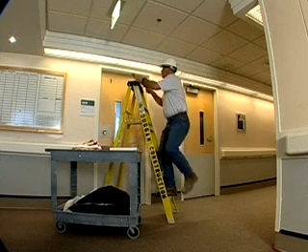Because the performance of a Firestop system in an actual fire is largely dependent upon how it's installed, inspections of completed work have become an effective tool in ensuring life safety compliance. Proper inspection, however, requires more than simply ensuring that the Firestop is present.

Authorities having jurisdiction have been performing thorough inspections on Firestop in new construction for more than a decade. But because this level of scrutiny is rare on work performed in existing facilities, a chronic problem of missing or improperly installed Firestop has become widespread.

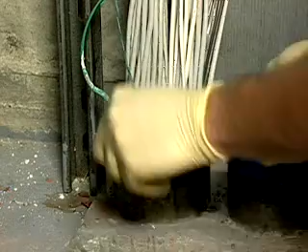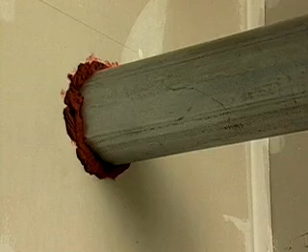It seems unfortunate that inspections are even needed, but the reality is that too many untrained people are expected to do fire stopping. When inspections reveal deficiencies, however, and you hold up your payment to vendors and contractors, the message quickly becomes clear and standards begin to rise. The purpose of this tape is to help provide proper inspection practices as a tool to raise the performance standards of installed Firestop systems.

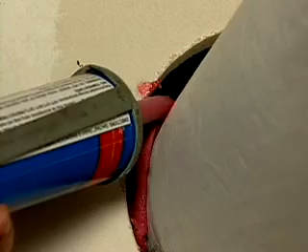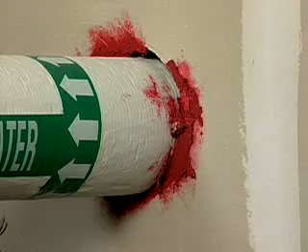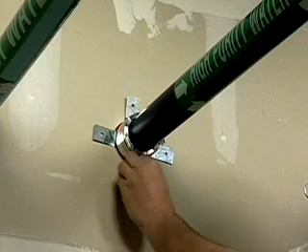If you ask the average trade person how to inspect Firestop, you will likely be told simply make sure that the penetrations are sealed with red caulk and that there is a UL logo on the tube. Unfortunately, this would confirm little more than red caulk is present, which really tells you nothing for several reasons. First, caulk alone is often not enough. Other accessories are sometimes needed, such as collars, wrap strip, mineral wool, or aluminum foil tape. If all you were looking for was red caulk, and these items were required, an improper installation might inadvertently pass inspection.

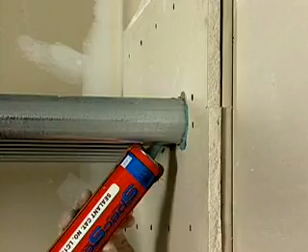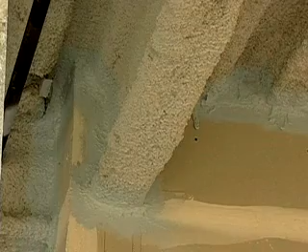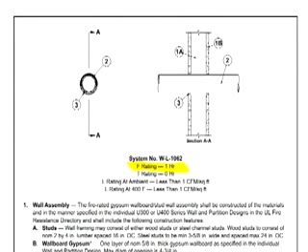Likewise, there are many legitimate Firestop sealants that are not red. So rejecting an installation on the basis of color is simply inappropriate. Finally, there are a host of other parameters to consider that are overlooked by simply inspecting color. These factors are all detailed in the UL system information and include such things as making sure the sealant is installed to the proper depth, the hourly rating of the UL system matches the rating of the barrier, and making sure that the product is tested for the type of penetration in the barrier.

So how do you know if a given installation is properly installed? In fact, the only way to be absolutely sure is to perform a destructive inspection. But since cutting out every installation is impractical, let's review how this can be better accomplished. The first step is to ask the installer for a copy of the UL system that was or should have been followed during the installation.

Now, the UL system clearly spells out how to install the product, what can be done and what can't be done. It's a roadmap. And if he or she can't produce it or doesn't understand what you're asking for, well, it's best to simply reject their work without going any further. This is done for two reasons. First, if they installed the product without a roadmap, chances of a compliant installation are rare, and there's no point in wasting any more of your time.

Secondly, this sends a very clear message about what's expected. People are smart and learn quickly, and when the time comes to reinspect later, chances are they'll be better prepared. If they can produce a UL system for each installation that you choose to inspect, then these are the steps that should be followed.

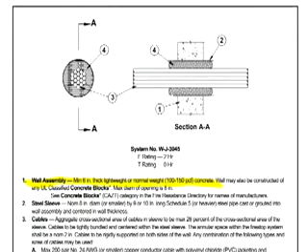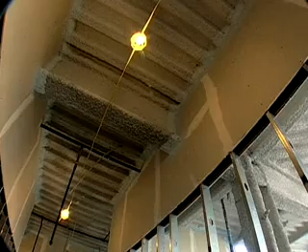First, confirm that the barrier type matches the system. If the drawing you were given is for a concrete block wall, but you are looking at a gypsum wall, there's a problem, and the installation should be rejected. If the opening in the barrier is a construction joint, the additional step of confirming whether or not the joint is static or dynamic is necessary.

If you're unsure whether or not the joint moves, either check with a professional engineer or err on the more conservative side and assume that it's dynamic. A UL system that's tested in a dynamic condition may be used in either joint condition, but a static tested UL system may only be used in joints that don't move. Likewise, if you have a 3-hour barrier but are handed a 2-hour UL system, there's also a problem. Whenever examining wall penetrations, be very careful of the hourly ratings.

In concrete walls, a system with a 2-hour rating includes coverage for 1-hour walls as well. But in gypsum wallboard walls, a system that only says 2 hours doesn't include coverage for 1-hour walls. Now, if it says 1 and 2 hours, then of course it can be used in either. Now, while these seem like nitpicking details, they're published this way for a reason.

A system that may work in a 2-hour gypsum wall may actually fail in a 1-hour wall because there's one less layer of wallboard available to recess the sealant into. If everything checks out, then proceed to confirming the penetration type. Otherwise, the installation should be rejected.

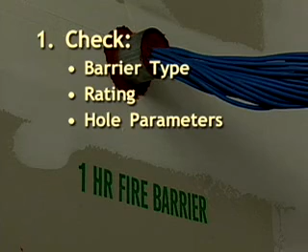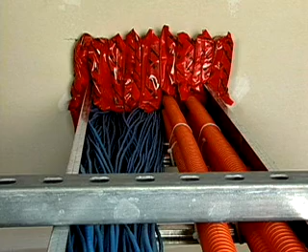If the barrier type, rating, and hole parameters all match the requirements of the UL system, then the next thing to check is the penetrating item itself. First, identify what it is: pipe, conduit, duct, cable tray. Next, confirm what it's made from: steel, copper, aluminum, PVC, polypropylene, and so on. Then determine what the trade size is. Pipes and conduit are easy, but cable tray and HVAC duct should be measured.

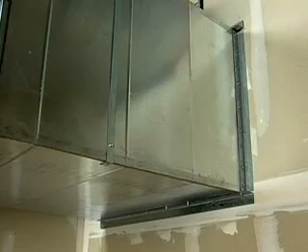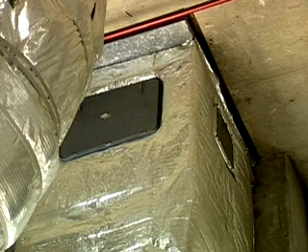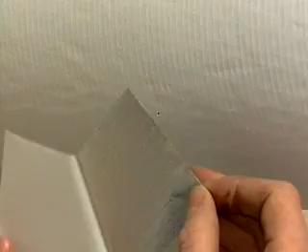For HVAC ducts, note if the dimension is round, flat oval, or rectangular. Note also the gauge of steel used and whether or not a damper is present. Then, for insulated duct or pipe, determine what type of insulation it is and how thick it is. Be sure to reseal any penetrations you make in the insulation during inspection.

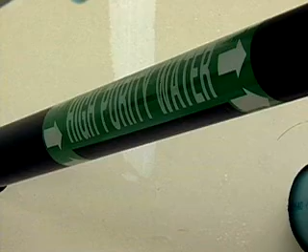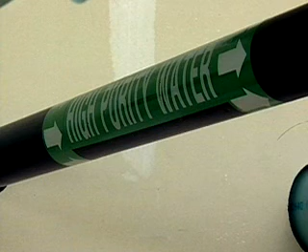If it is combustible pipe, you need to know if it is vented or closed, as they are sometimes firestopped differently. This is because vented plastic pipe, such as DWV or acid waste lines, burn rapidly as oxygen is pulled in to feed the fire, while closed plastic pipe, such as RO or deionized water lines, burn somewhat less aggressively.

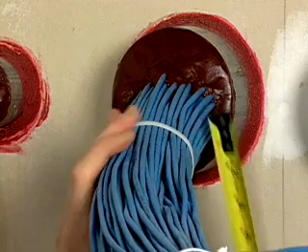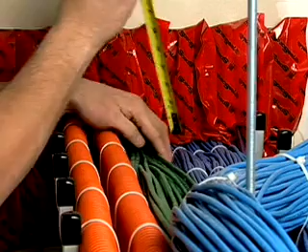For bundled cable, measure the maximum diameter of the bundle and note what type of cables they are. For trays, note whether it is steel or aluminum, open ladder or center hung. Then calculate the cable load and measure the maximum depth of cables in the tray. If the penetrating item is routed through a sleeve, note this too. As you run down the checklist in the UL system, it will quickly become obvious whether or not the proper system was provided. If not, the installation should be rejected.

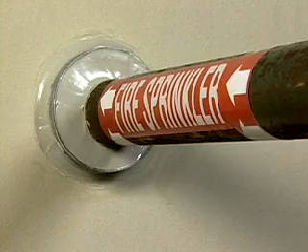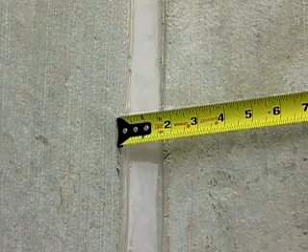Whether the condition is a joint, a blank opening, or a through penetration, the next step is to confirm the size and shape of the hole. For blank openings, the UL system will list the maximum size. If the actual hole is larger than this, there's a problem. In linear applications, be sure to confirm that the width of the actual construction joint does not exceed the largest permitted width in the UL system.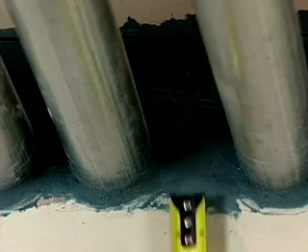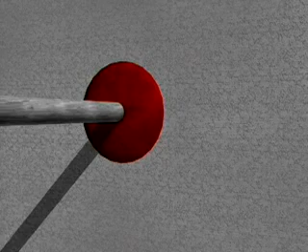When the opening contains one or more penetrating items, the process is similar, but we have the additional step of measuring the annular space, or the distance from the outer diameter of the penetrating item to the inner diameter of the hole. The annular space is a significantly limiting factor for firestop systems because the larger it gets, the harder it is for the sealant to do its job. An excessively large annular space may require additional measures such as adding more mineral wool to prevent the sealant from blowing out in a real fire.

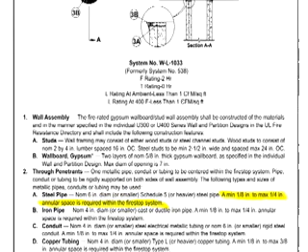The UL system limits the annular space to some specified minimum and maximum in inches. Both the upper and lower limits tend to vary quite a bit from one system to another. Because pipes are rarely centered perfectly in the middle of a hole, many recent UL systems have been tested to permit the penetrating item to be off-center, and in some cases, even touching one side of the opening.

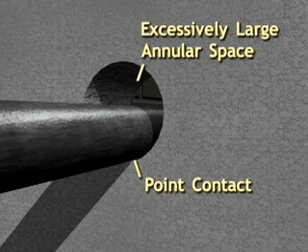This condition should raise a flag, since you would now have both point contact and an excessively large annular space on the opposite side. Look for this and accept only installations that have been installed as tested. On non-combustible pipe, it's not uncommon to see the UL system permit point contact or zero annular space.

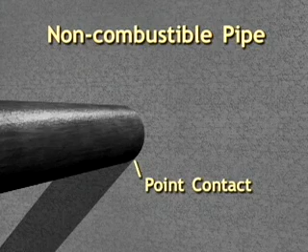Continuous point contact is where the penetrating item has no annular space at all and is touching the opening on all 360 degrees. An example of this is when gypsum board is cut to fit tightly around a pipe.

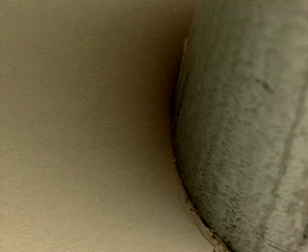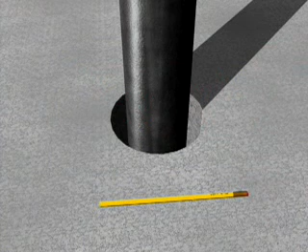If that pipe is a sprinkler pipe and penetrates fire barriers, structural walls, and certain other kinds of assemblies, take additional care as NFPA 13 mandates very specific annular space requirements. If the sprinkler pipe is 3.5 inches or less, there is a 1-inch minimum required annulus, while larger pipes are required to have no less than a 2-inch nominal annular space.

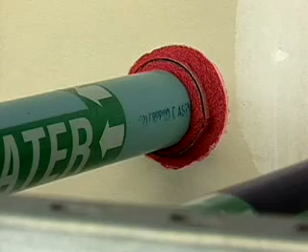When the penetrating item is combustible, the UL system often requires a minimum annular space of some amount. This is very important, as it allows enough space for the intumescent material to be inserted into the hole, permitting it to expand and close off the combustible item. Now, if too little intumescent material is used, the Firestop system may not work as designed.

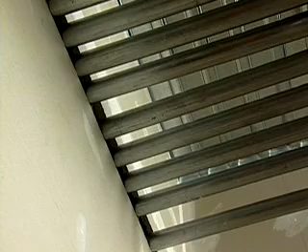If the annular space in the as-built condition falls outside the parameters permitted in the UL system, it must be rejected. Another annular space condition that merits special attention is around grouped penetrations. If the annular space measurements fall within specified tolerances, then proceed to confirming the Firestop materials themselves.

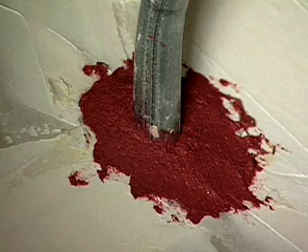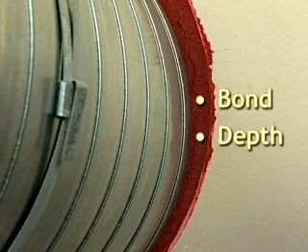There is a popular term in Firestop jargon known as caulk and walk, which refers to UL systems that require nothing more than Firestop sealant. If the system being inspected is one of these, then your job's very easy. There are two things to check: the bond and the depth of the sealant. When confirming the bond, make sure that the seal is well adhered to both the barrier and the penetrating item.

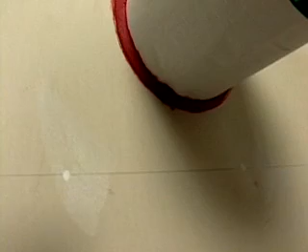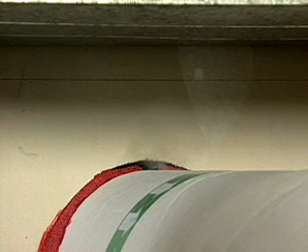Because it can be difficult to get a caulk gun all 360 degrees around a pipe when working in a confined space, pay close attention to the top of the seal around 12 o'clock. It is amazingly common to find penetrations with the top section unsealed, which clearly must be continuous.

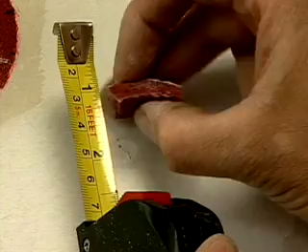Confirming the sealant depth requires destructive inspection and is simply a matter of cutting out a section of Firestop, which might be caulk, putty, mortar, or spray, and measuring it to compare against the minimum depth specified in the UL system. Achieving the proper sealant depth is especially critical on combustibles such as plastic pipe, cable bundles, and insulated pipe.

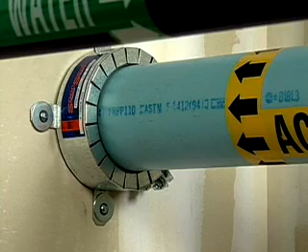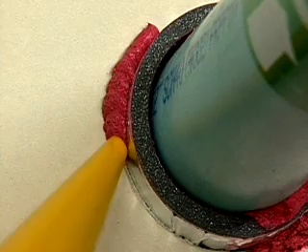Most UL systems, however, are not the caulk and walk variety and require more than just Firestop sealant. They often require the use of an assortment of accessories and additional Firestop products, such as collars, wrap strip, and mortar. When multiple products are used in one opening, make sure that they are manufactured by the same company, as required in the UL system. Mixing Firestop products from different manufacturers voids all warranties and places an unnecessary burden of liability on the installer.

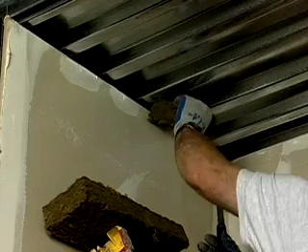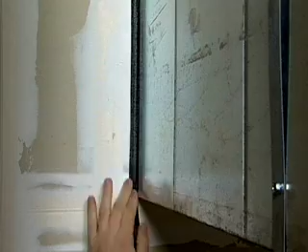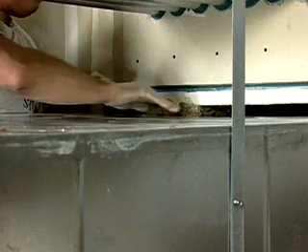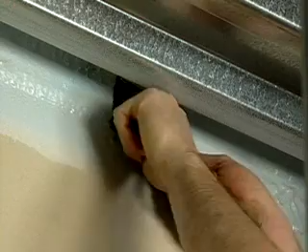The most common accessory is mineral wool, but depending on the system, other items such as foil tape, angle iron, fasteners, hose clamps, and backer rod may be required as well. The exact requirements are detailed within the UL system directory. When packing material, such as mineral wool, is required, it is an integral part of the UL system, and inspecting it is just as important as inspecting the sealant itself. If the requirements specify 3 inches of mineral wool, this is the minimum allowable depth and should be confirmed.

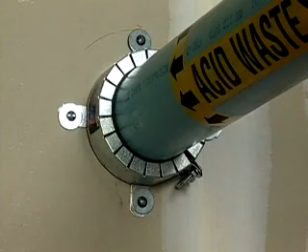When a Firestop collar is anchored around a combustible pipe, make certain that the tabs are securely closed, the correct fasteners are present and well anchored. This will help ensure that the collar doesn't burst apart or fall off the assembly while expanding during a fire.

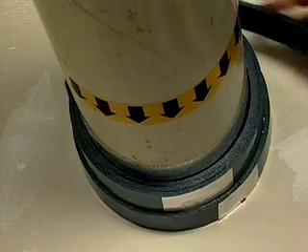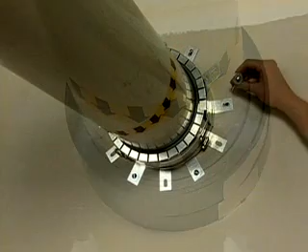When wrap strip is used, take special care to read how many layers are needed. Some systems require up to 10 layers of wrap strip, and if less is used, the system is non-compliant and should be rejected. The restricting metal shell that encapsulates the wrap should be well anchored to the fire barrier, like the collars, and require either screws or hose clamps, depending on pipe size.

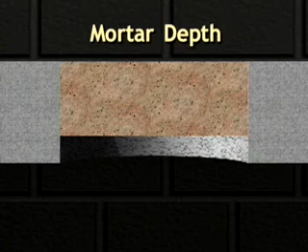Like sealant, Firestop mortar must also be installed to a minimum depth, although much deeper, usually around 4.5 inches. The depth of mortar can be inspected non-destructively if you know how thick the wall or slab is. Measuring the recess and subtracting it from the barrier thickness yields the mortar depth.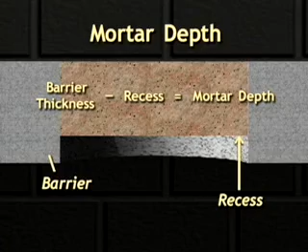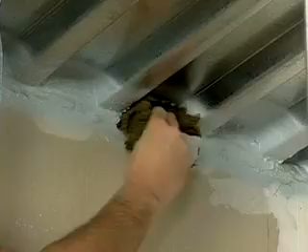When inspecting joints, the same principles apply. There is usually packing material, such as mineral wool or backer rod, that has been compressed to a certain specified amount and then covered with either a thin film of spray or caulked with a bead of sealant. A simple destructive inspection will reveal if the seal and packing material has been installed to the proper parameters.

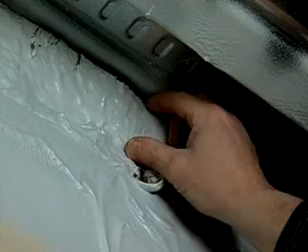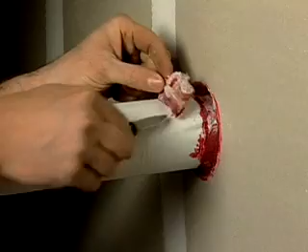When inspecting Firestop, it would be extreme to go to this level of scrutiny for every condition, and yet destructive inspections are the only way to be absolutely certain that an installation is truly acceptable. So, are inspections even useful? Well, the answer is yes when used properly. Human nature works to your advantage, because when people know they're being watched, their work tends to improve.

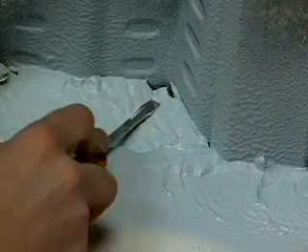Now, this is easily accomplished by establishing a consistent policy of checking a small number of random penetrations for all installers. If you're familiar with the installer's work, it should be obvious what level of inspection is needed based on their track record. If you don't know someone's work, performing destructive inspections on a few random installations will quickly give you a sense of whether or not the installer knows what he or she is doing.

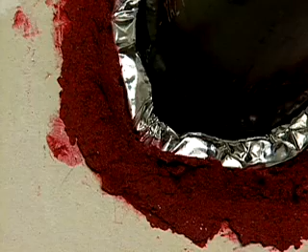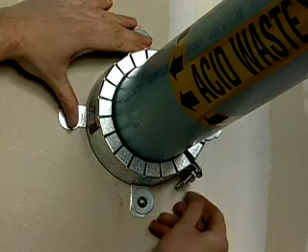Even though a majority of the installers strive to meet the UL standards, the knowledge that their work is to be randomly inspected is just another incentive to help ensure that the proper systems are being used and that they are properly installed. The most effective way is to start by randomly selecting a number of conditions and performing destructive inspections. If it is a small job, start with a few. If one is wrong, check 3 more.

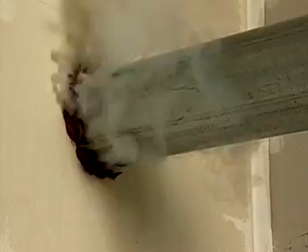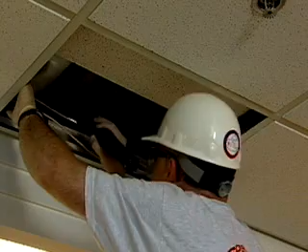If rejected installations accumulate, it will become painfully obvious to the installer that there is a serious problem, and you will likely find little resistance in rejecting the whole job. On a large job with hundreds of penetrations, select a small percentage of the total, such as a few in each room. For each one that you find that is wrong, inspect several more. You will quickly get an idea if 1 or 2 isolated cases were improperly sealed, or if these rejected installations are symptoms of a much larger problem.

If you have no confidence in their ability to remedially correct their work, you might consider back-charging them and paying someone with proven skills to finish the work properly. If a pattern of unacceptable work emerged from one job to the next, you may also consider back-charging them for excessive inspection time. Now, by following a formal and consistent inspection process, all workers sealing penetrations in your building will begin to realize that standards must rise or their work will be rejected and they may not be hired back.

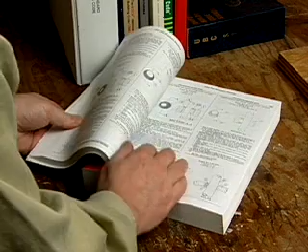The best tool for helping to reduce the amount of time spent inspecting Firestop installations is standardization. The UL Fire Resistance Directory contains over 2,000 systems in total, most of which are redundant. If you can standardize around the fewest number possible, you can radically simplify the inspection process. For example, it would be easy to standardize every sleeved opening in gypsum board walls full of Category 5 cable bundles around the requirements of one specific UL system.

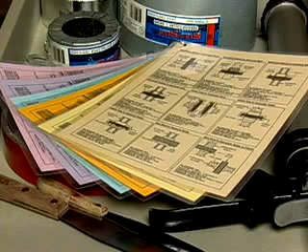Before long, you'll have the UL system requirements memorized, and all of these sleeves will start to look the same, reducing the inspection time. Considering that each craft in your facility may need only a half a dozen systems to cover 99% of their applications, you can reduce the thousands of potential systems in the UL Fire Resistance Directory down to a manageable number.

In the end, it's impractical to expect inspections to provide absolute confirmation that all Firestop installations are performed properly. Inspections, nonetheless, are a powerful tool not only in assuring compliance, but in communicating your expectations and raising the standards of Firestop installation overall. If installers know that no exceptions will be tolerated at your facility, they'll work even harder to make sure all of their work will pass inspection. A clearly stated inspection policy ensures better work, less time spent inspecting and repairing seals, and helps ensure compliance.